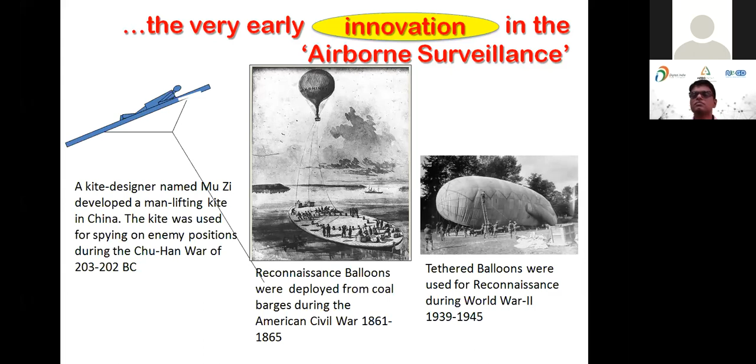In the early BC 203-202, a Chinese kite designer designed a huge kite by which a man can be carried on it, who could probably fly and see the location and the formation of the opponent, thereby giving enough information to the fighting side who can probably win the war. Likewise, this type of reconnaissance balloons continued during the American Civil War in 1861-65. Likewise, even in World War II, the balloons were used for various applications.

Having said that, in the Second World War time, both radar and the aircraft matured to a state where the fighting vision was mostly from the air. While the aircraft were able to fly at a tremendous speed and come close and bomb the various places, the World War II radars also were able to identify, detect, and find out the presence of the enemy's aircraft in the territory.

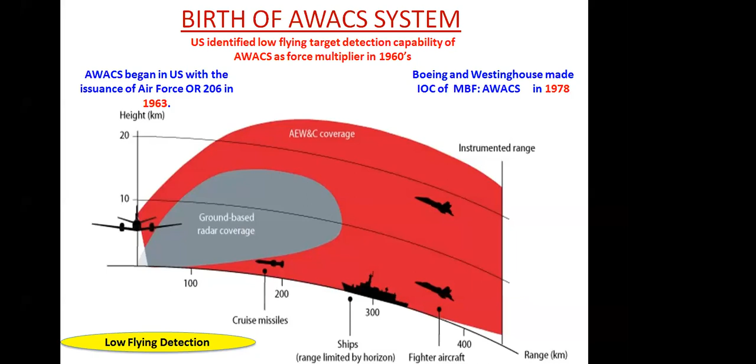So there was a conflict of interest. While the enemy would like to penetrate, the other country is able to see him at a far off distance itself, using radar. But these ground-based radars cannot see the targets which are flying at low heights.

So the pilots started an innovation by flying at low heights, meaning the ground-based radars cannot detect them. As you can see in the picture, the gray shows targets can come very close to us if they are flying at a low height.

So therefore, an invention started for bringing in AWACS, which is nothing but radar and other sensors put on board the aircraft, which could see much longer distance even when they are flying at a low height.

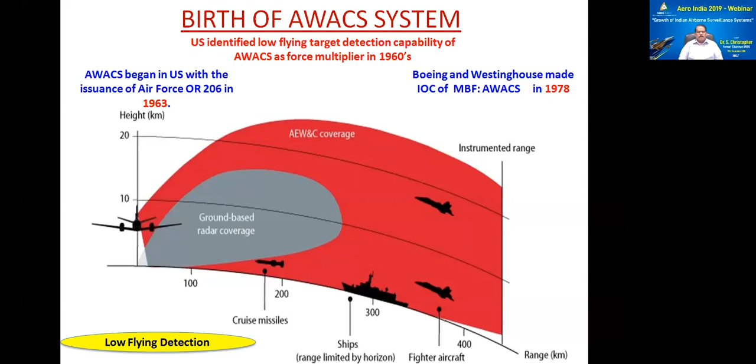For instance, AWACS began in the US as an operational requirement 206 in the year 1963. However, the IOC configuration could be introduced, even as a B2 whatever we call it, only during 1978. So it has taken about 15 years, whereas the full-fledged AWACS has taken about 20 years.

In the case of AWACS, what exactly does it do? It gives a multiplying effect for our force. When they are at the forefront, they may not be operating the radars, but the surveillance radar on an aircraft at the back could see much beyond and was able to communicate to the fighters and give them the required information. So that is how it is a force multiplier.

In the Gulf War in 1991, it was told that it was won by AEW&C, Airborne Early Warning and Control Aircraft. Hawkeye is one, and of course Sentry is another one, E2 as well as E3. The difference is one is on an aircraft which is a turboprop, the other one is a turbojet.

Obviously for short runways or a shipborne aircraft, it has to be a short runway. Naturally, the Hawkeye is the very useful one, whereas the Sentry can be used for very high altitude, long endurance, long surveillance.

At that point of time, it was used only with mechanical rotation. That means you have to have an antenna fit onto the dome which rotates at an RPM. The revisit is not possible. It's a mechanical scanning, which means inertia comes into play.

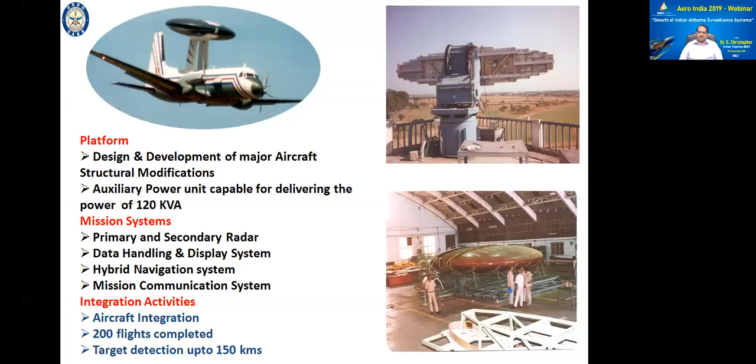So theoretically, worldwide there were systems with mechanical scanning, which you can see 3 of them - American AWACS, as well as E2 and E3. In addition to that, Russian systems are also available.

While on the other side, early 2000 onwards, started by Ericsson of Sweden, what is known as Erieye - that has electronic scanning. What you can see is the flat antenna without any dome, fitted onto a smaller aircraft, which could see on either side plus minus 60 degrees. That means out of 360 degrees, they can cover up to about 240 degrees, slightly stretching even up to about 300 degrees. That's the maximum possible with those aircraft.

But then the technology is entirely different. There is no mechanical scanning, but it's totally electronic scanning. However, if you require 360 degree coverage, you must go with a minimum of 3 such antennas to cover the entire 360 degrees, or you can even use 4 antennas also.

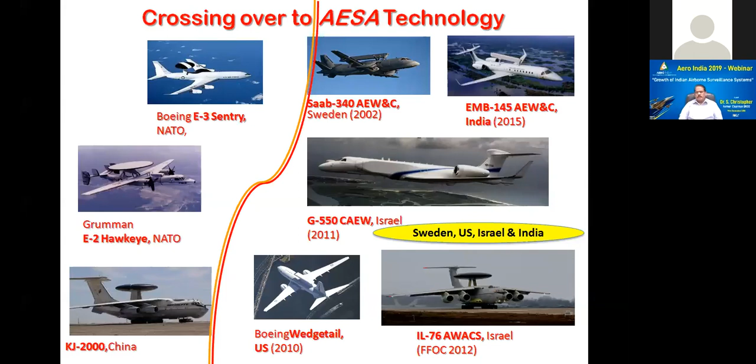So the advantage of AESA is basically to get inertia free. That means you don't have to have a mechanical rotation, which is really going to make your scanning or searching operation much longer, particularly when you're looking at a target which is coming at far off distance. You may have a revisit much later because the antenna has to make one complete rotation, while the AESA, that is active electronically scanned arrays, can probably revisit any number of times in a fraction of a second.

For us to conclude the presence or absence of the target right in the far off distance, thereby you are able to manage the energy given to you very effectively on those areas, whichever you like. In addition, in the event of failure, a single transmitter failure in the mechanical system would have probably stopped the total operation. While here, n number of TR modules, what we call it is a TR is nothing but the transmit receive modules, can probably stop working. In spite of that, we will have what is called graceful degradation. Obviously, the performance enhancement can be there because you may not be unnecessarily wasting your energy in all directions. However, you will spend more time and more energy on the direction of your interest.

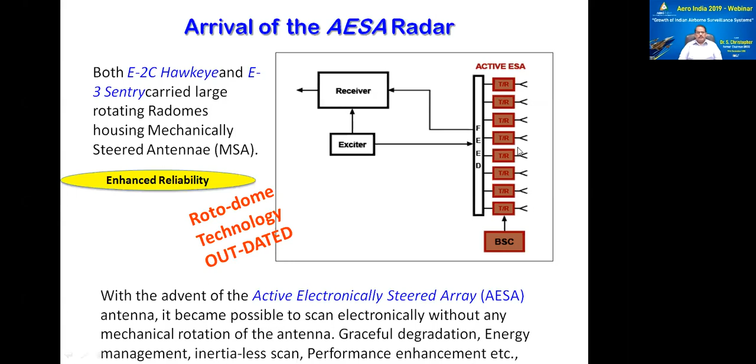So going back to the TR module specific, there is a small equipment or a sort of a unit which contains the final transmitting power, if not in megawatt, it is generally in watts, followed by also it will have an LNA. That is the transmit side, simple, smaller wattage level, that is hundreds of watt level transmitter, and the very sensitive receiver, both are there in a unit. If you can keep them together, multiple of them, then you call it as sometime transmit receive multi-module. That's what we are calling here TRMM.

In this particular example, we have used 8 of them together so that we could have thermal management effectively distributed. Because we are not having a single transmission, the power is getting probably amplified in more than one place. Naturally, the heat source is not going to be concentrated in one place, so the thermal management is excellent in these cases. In addition, this is precisely using what is called gallium arsenide technology, and further we have gone ahead with the gallium nitride technology also. These are all solid state amplifier devices having got an efficiency of 30 to 50% efficient.

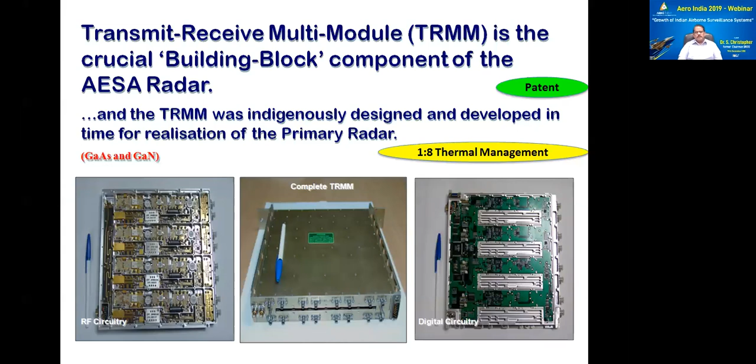What is the advantage of the primary radar having AESA is, as you can see, the scanning need not necessarily be sequential. You can go in any random sequence and have a revisit on the place of your choice and your interest. When you look at a threat, the threat is to be observed again and again till we confirm ourselves that the threat is a real threat or otherwise. So naturally, we have got an ability now with the AESA to have a relook on the targets any number of times. In addition, you can enslave your secondary surveillance radar also to the same place to not only identify but also to classify whether it is a threat of what nature, using the combination of primary and secondary surveillance radar.

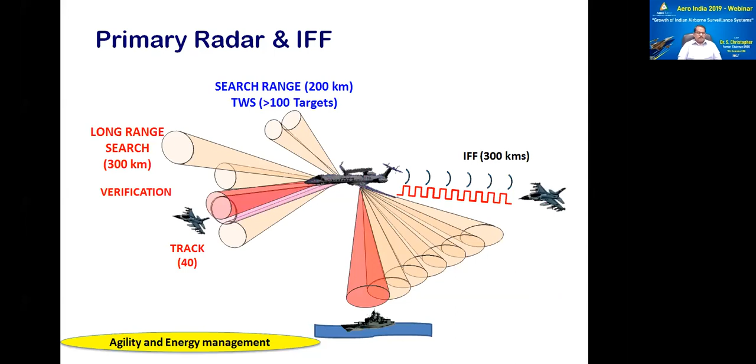The range part of it, some numbers are given here. That is immaterial because as long as the aperture as well as the power is managed, the power aperture product gives the range. You can always extract, by looking in some direction for a longer period, much longer range than what is indicated.

The total system was probably a combined effort of several organizations even within DRDO. CABS is a nodal agency which has taken the responsibility of the platform, its modifications, its wiring, and so many other aspects. In addition, it has also taken the complete secondary surveillance radar, mission communication system, mission system computer, and the operator workstation.

In addition, the primary radar has got a very critical element, which is nothing but that antenna unit which is on the top of it, which we call the active antenna array unit, AAAU, and it contains the power supply, radiating element, as well as the entire TR modules. So naturally, it also needs to be cooled and also needs to be powered.

The entire responsibility is taken by the nodal agency called Center for Airborne Systems, while the rest of the radar, two more elements like signal processing and data processing, as well as the exciter, was done by another organization called LRDE. Likewise, communication by DEAL at Dehradun, CSM by DLRL Hyderabad, and ESM and SPS by DARE. All these units are different labs of DRDO.

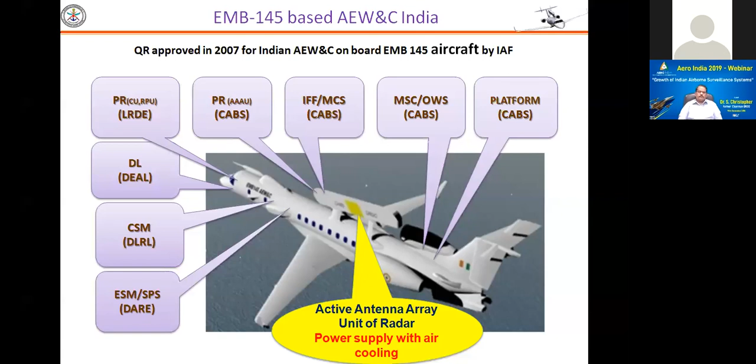We also have a KU band SATCOM terminal. The reason being, when the aircraft is operating at a range beyond line of sight for the other data link, you can always continue to communicate back to your station through satellite.

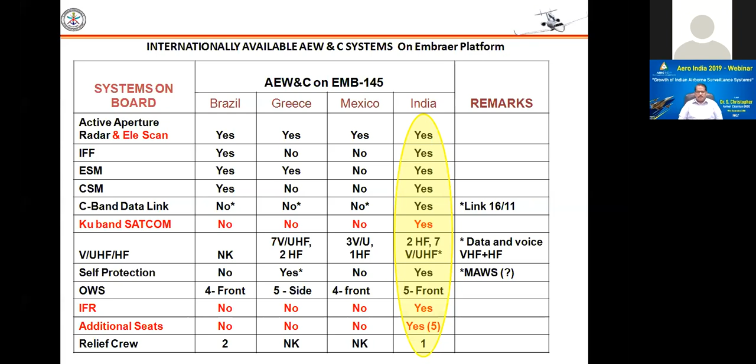Also, one unique thing in the aircraft itself is the IFR, in-flight refueling system, which does not exist in any Embraer aircraft till today. In the AWACS, it is very essential because you get additional flying time. Obviously, because you're refueling, you must have some extra seats also.

The entire interior is nicely ergonomically designed, with 5 operator stations and 5 rest crew seats. All the other electronics is nicely packed in rack form, so you cannot see any cable or hanging things internally.

It also gives a very good advantage of noise reduction, so personnel working inside have a comfortable time for long periods of serious work. It has additional 4 fuel tanks inside, in addition to the wing tanks, to extend endurance for a longer period.

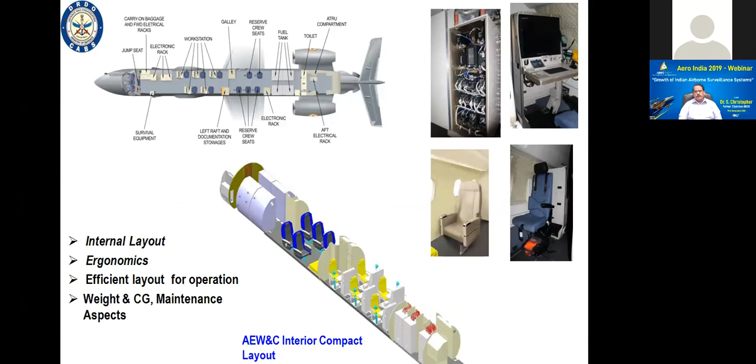In addition to the interior, externally, if you look at it, there are a huge number of antennas. Some of them are small, and you may not be able to visibly see them, but there are so many sensors out there. The aircraft per se has about 29 sensors, whereas this system has added many more, so nearly 80 sensors in total are on the aircraft.

The challenge here is, what do we do when we have too many antennas and sensors all around the aircraft? How do we avoid mutual coupling or interference from one to another? It is possible only if we manage 3 things: space, frequency, and time. When I say space, that means if I want one antenna to not interfere with another, we have to separate them as far as possible.

With a given small aircraft, there is a limitation on that; you cannot indefinitely keep them separated. So then what we do is try to exploit the frequency, the spectrum. When one radio operates in one frequency, we try to use an entirely different or far off frequency for the next radio. But then you've got 7 radios simultaneously working, so naturally a lot more has to be done.

The last point is time. When we operate the radar, pumping huge amounts of power, there is always a possibility a receiver on the ESM side may get saturated because of the huge power coming from that radar transmission. So it is possible for us to give a gap or put a notch filter to avoid those frequency areas. By doing this, combining all 3 - space, frequency, and time - we address this challenge, and it was indeed a problem.

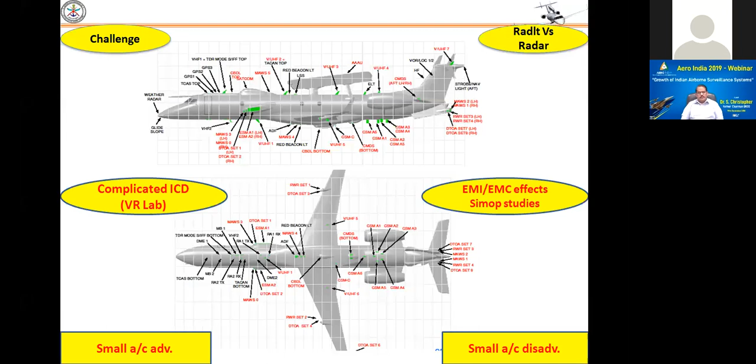Having done this aircraft modification, interior and exterior, the major component, which is probably very critical in this system, is the AAAU, the active antenna array unit, which goes externally.

Unlike any other conventional radar antenna, where enough energy would have been spent designing the antenna per se for performance - its pattern, side lobe, or gain - in this case yet another dimension has to be considered. First of all, it has to be aerodynamically very streamlined, because being an external unit, it is likely to give drag.

Naturally, the aerodynamics has to be taken into account, and the internal aerodynamics also, because we are trying to save the energy for cooling or for the heat removal by simply using the normal flow of air as the aircraft flies for cooling the electronics, which is a very critical system. Likewise, we have got a radome to be tackled, which has to have complete transparency as far as the microwave is concerned, but at the same time should have enough rigidity to protect the antenna.

And there are a good number of softwares. It should not get corrupted, and there are a good number of tiny, very small electronics; it should not get burned. So all these things have to be taken into account in terms of design.

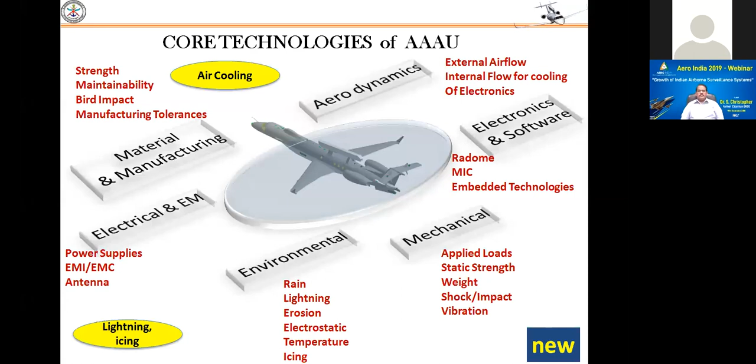So looking at the interior, the air goes from the inlet and takes a turn downward. This is specifically done to ensure the rainwater that goes inside cannot reach the electronics but can only go downward, as the water particles are heavier and will not rise to the top, whereas the air alone will go for cooling. There is a trap for the rainwater, and it gets collected and removed. That is the way of protection from rainwater soaking directly.

However, they are all made in such a way that some amount of spraying water will not make any difference to the electronics. In addition, as the air traverses, it has a tendency to go towards the end and get exited through the few TR modules kept at the end of the entire array. But the design has to be such that we ensure each and every TR module, right from the beginning till the end, is able to cool in an appropriate way.

The bottom portions show the design details. The hotspots are given to you, and how these hotspots remain well within the permissible limits of the operating temperature of the elements or electronics used.

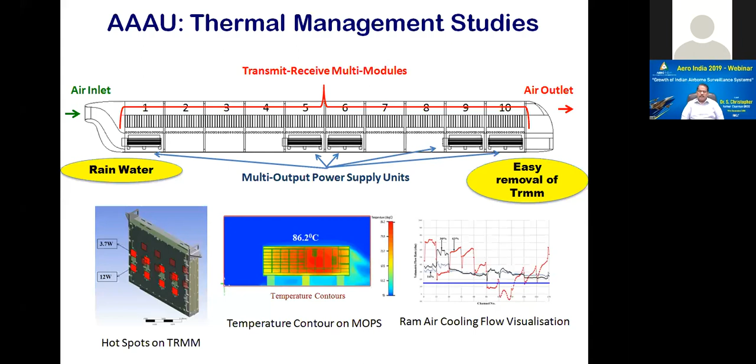We also made use of the entire antenna in a very effective way to ensure that structural rigidity comes out of the antenna itself. The antenna is nothing but a slotted array which radiates the S-band, whatever frequency we are assigning, so it is basically a metallic body. The metallic body gives us two advantages, which is why we call it one of the innovations. One is that it gives rigidity to the entire antenna in terms of flexing and other structural aspects. In addition, it also gives a sort of Faraday cage for the complete electronics inside. That is the reason we could achieve very good shielding when there is a lightning effect.

We have tested this antenna against simulated lightning, and there was absolutely no problem for the electronics with this.

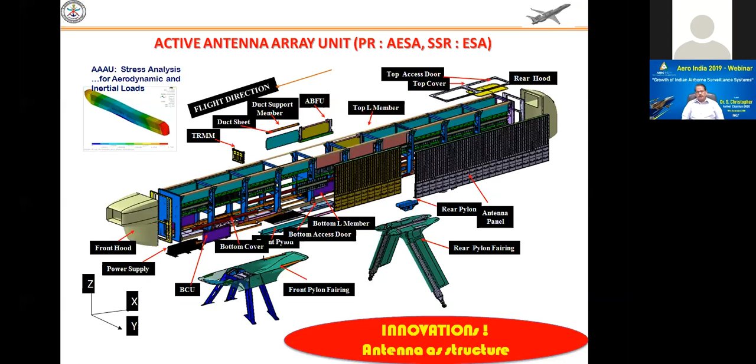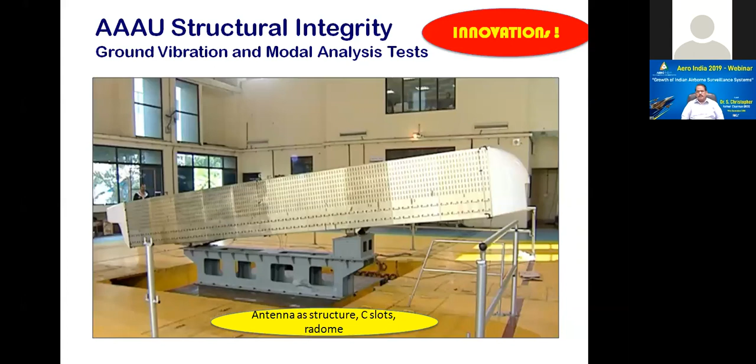The actual antenna being tested for various conditions - you could see the slots because the top layer of the radome is removed in this case. We also see two different types of slots: one for the primary radar, the other for secondary surveillance radar. The structure is made out of a metallic body, which gives us the advantage of sufficient strength and rigidity, as well as the property to protect or shield the electronics inside.

The most important aspect is the radome. The radome is supposed to give protection for the electronics and the antenna. At the same time, it is also supposed to be transparent.

And it is completely tested for all the properties and it is satisfied totally.

In addition, the peculiarity of the total system is that, like any other aircraft, this being an external item has to go through what is called the bird strike test. Unless it passes the bird strike test, we cannot use it as an external body. So we have gone through the testing and are completely satisfied.

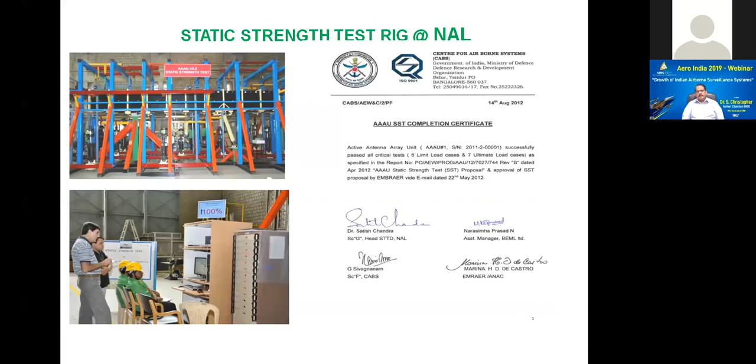We did the static strength test at NAL with a very good amount of tolerance, and it could meet that. The problem is, if you over-design something very rugged, I'm sure all the tests will pass, but still nothing will have been proven. If you do a flimsy design, it will break even before we conduct a few critical tests. But I was told by the Brazilians themselves that our design is excellent, in the sense it was very critically designed and thereby optimum for the usage.

In addition to the structural aspect, when you look at the electronics, the TR module is only generating the power. That power needs to reach none other than the antenna elements themselves. Unlike other systems in the world, which have no electronic scanning in elevation, only azimuthal scanning, here we have taken the responsibility of including electronic scanning in elevation as well.

That is how the number of cables is much, much higher here - equivalent to about 2 kilometers of RF cables are utilized to power the 8 elements in elevation, and that gives us a scanning capability. Even in steady state flying, when there is a roll of 1 to 2 degrees, the scanning will take care of it and keep the beam right on the target, even at low flying stages.

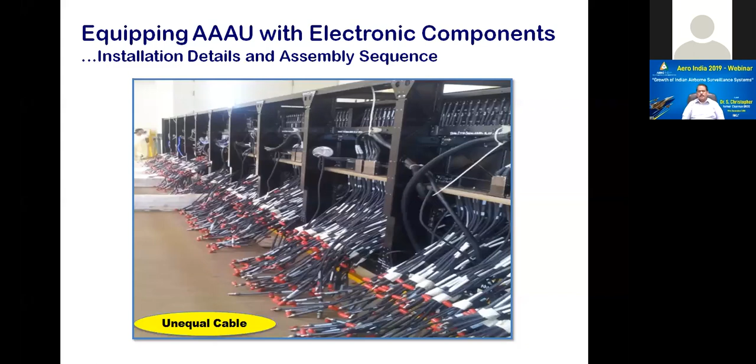Another important point to look at is what is called water stagnation, or the place where ice accretion can happen. When ice is formed, it will break after some time, and that piece, if it happens to go into the engine - this aircraft having a rear engine - there is a possibility it can create an engine failure problem. In order to avoid that, we were given a constraint of not more than 600 grams for any piece of ice that breaks and falls. So that is a constraint.

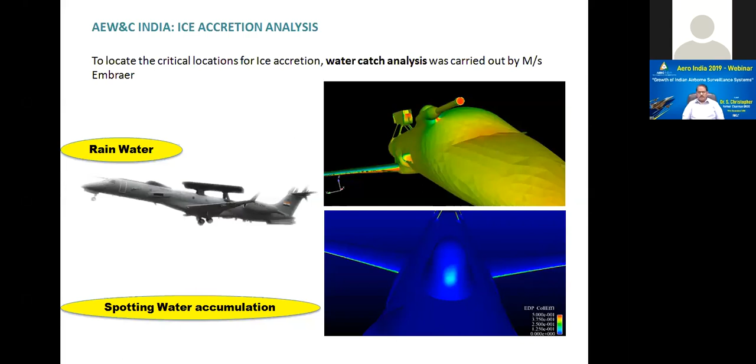That is what the design has to go through. We've gone through that. Next. So if you see that in the case of the radome, the places where all the ice can form as the aircraft travels through the icing condition, those places are to be protected. Next.

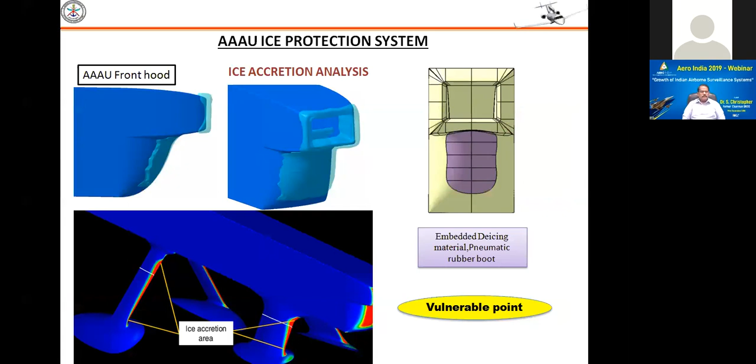When we do that, there is a possibility of having an electrical way of removing the ice, or compressed air or air from the engine can be utilized to break the ice. The second option is utilized because consuming electrical power is going to be detrimental for operation of the system, as it is going to consume some amount of the available power continuously. So we found that a very elegant way of doing it is through the compressed air. However, in the antenna, a lot of changes and modifications need to be done to see that the compressed air is taken to the places of interest.

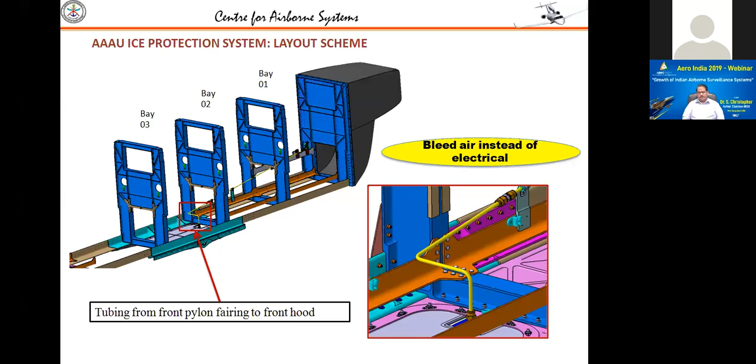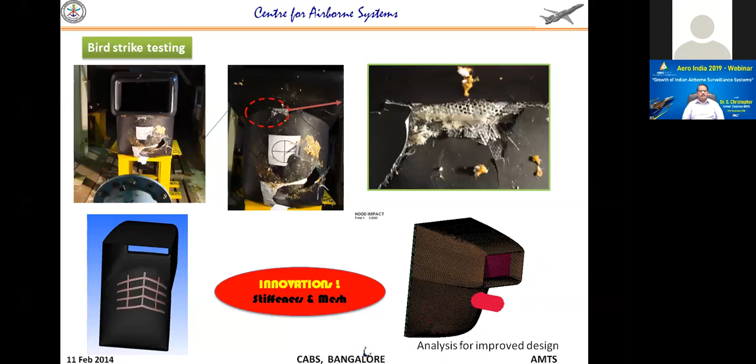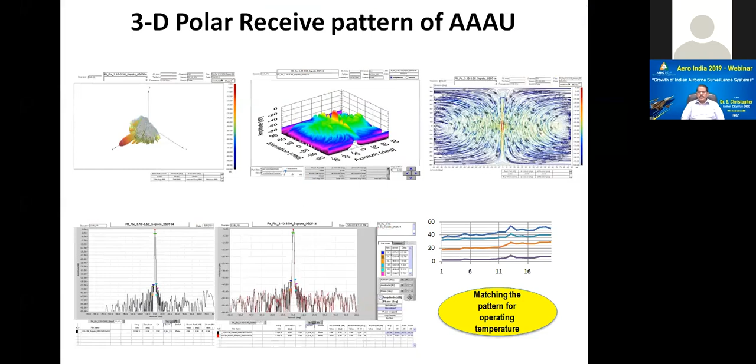Now, ultimately, looking at the antenna as an antenna as such, the pattern ought to be looked into. Being an airborne radar, the pattern in 2 dimensions is not the only thing that is essential. We need to look at it in 3 dimensions because apart from the main lobe, the entire side lobe structure is going to look at the ground, which means there is going to be a lot of clutter. In addition to that, what we test at the ground has to be evaluated when flying at a higher altitude, where the temperature could be lower. Even that is tested and managed.

The next part is, when we combine both the primary and secondary radar, the process through which we evaluate, and ultimately what we call calibration, so that the antenna elements behave uniformly and get you the best possible pattern. Next.

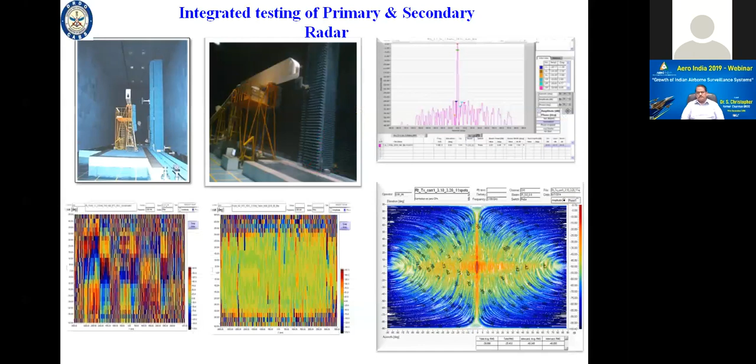Another important study: the antenna, given a chance by the antenna engineers, should be as far away from the body as possible, meaning infinite distance between the body of the aircraft and the antenna. From the aerodynamic structural point of view, it should probably be inside the aircraft itself; then only it is the best. But we have to come to a compromise. The study was conducted and we evolved a very good distance by which both the aeronautical requirements as well as the electrical requirements were just met.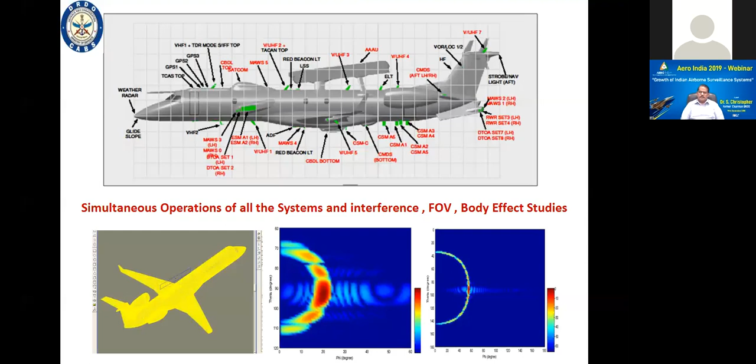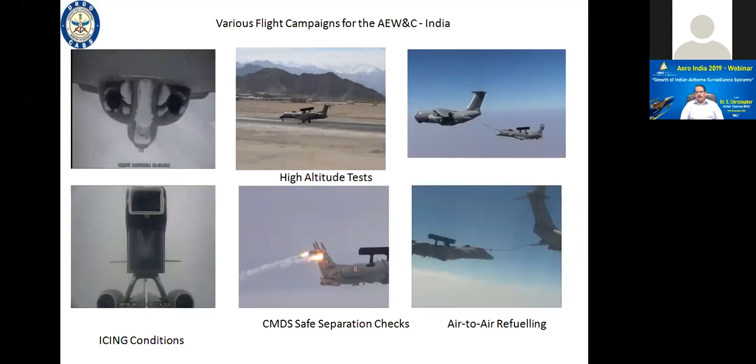These are some of the tests and trials carried out. One is in Norway, where we conducted the trials for the icing conditions. As you can see, without using the icing equipment, how the ice will be formed, and then we created that, and finally we cleared that. The other one is the highest altitude at Leh. The takeoff and landing was done, and air-to-air refueling was carried out several times. In addition to that, the emission test for protection against missiles was conducted using CMDS or flares from the aircraft. All those tests and trials were conducted.

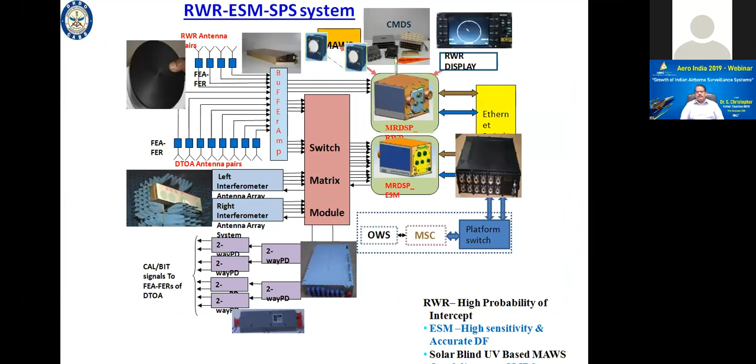In addition to the radar, the other major important system is the ESM system. It also has to have a self-protection unit and obviously the radar warning receiver. All were combined, and it gives 360 degrees coverage for the system. This is specifically how the CMDS is controlled by the pilot. When he finds a threat, the cockpit monitor shows what direction the threat is in, and the pilot decides on the type of software to be used for avoiding the threat. That is what is being depicted here.

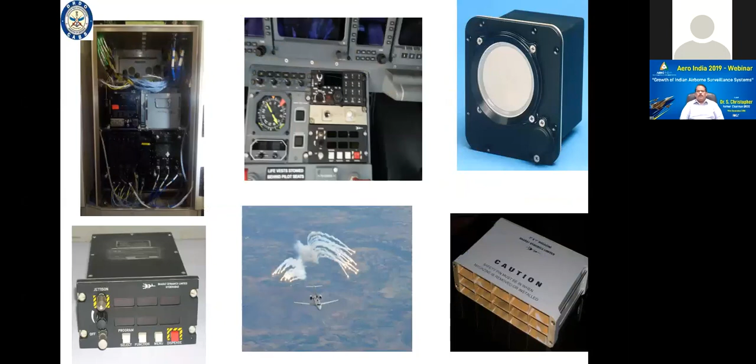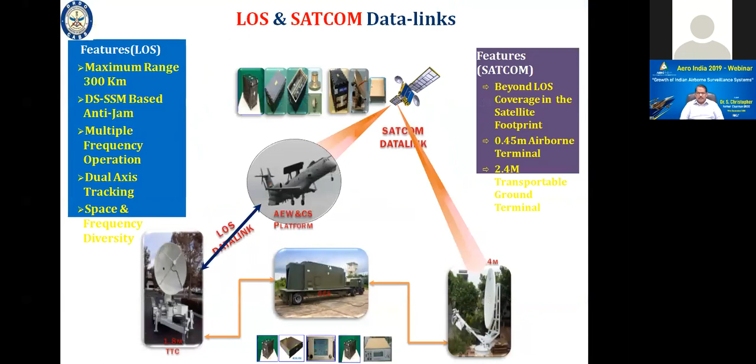We also said that we have a communication system. In addition to the line of sight communication, we also have what is called satellite communication. So beyond line of sight also it can be covered, and it is all the time coming to the ground. The mission communication system is nothing but talking to the pilots, giving them instruction, and there are 7 radios there which operate both in VUHF as well as in the HF region.

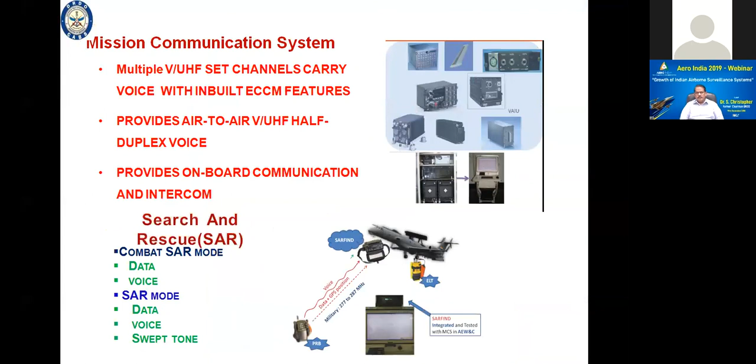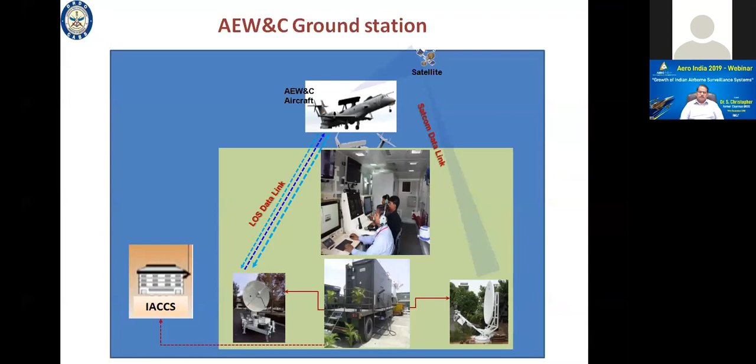Next. As regards the ground station is concerned, we must have an equally powerful ground station, because entire AWACS information is going to get into the IAF node, that is IACCS, and thereby we can transmit and also get the information from various radars.

The last but not the least is the ground preparations. We call it mission planning and analysis station, where the entire mission is planned, and when the mission is completed, complete data is analyzed to get full information about the entire process.

Next is, for any of this operation to go ahead very well, the operators ought to be trained. We cannot train them all the time on air. So a huge setup is created, equivalent to whatever is there in the air. In addition, we also have a trainer, and he also has the possibility of introducing the recorded data as well as simulated data, which may or may not come in the entire lifetime. But however, the operator must be trained for those situations. That's how the training station is created.

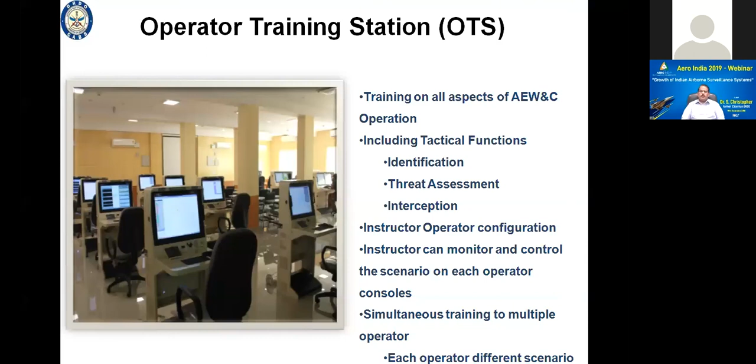Next. Having done that, all the equipments are very high quality equipments. It may not be possible for us to just test with a very simple methodology. And they are not in hundreds of numbers. So that has to have a very good automated test equipment. Almost the entire system can be tested independently or together with this ATE, thereby right at the operator's level itself.

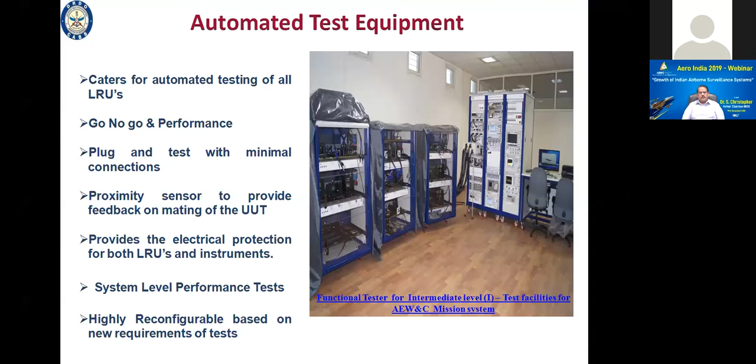That means at the field itself, they can come to know what exactly is the problem and immediately replace and go ahead with their operations, while the part that is to be repaired or is working wrong can be sent to the laboratory for testing. And this ATE is also completed.

So having got the complete maintenance and operation, as well as all the tests completed, as it was told in the beginning, in 2017 the first aircraft in the IOC configuration was handed over to the chief in the presence of the Honorable Minister.

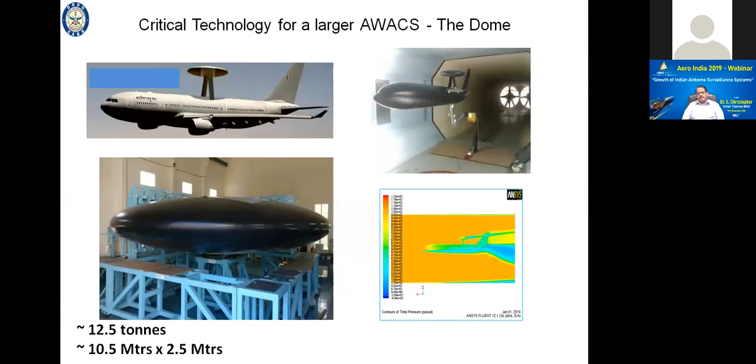Having done that, India is going towards the next generation, which is nothing but the AWACS, which is a bigger version of exactly what we have done. And it should also cover 360 degrees. Obviously, when I said 360 degrees coverage, we must have minimum 3 antennas, which cannot be kept as a rectangle on top of the aircraft. So naturally, when you have a triangle or any other dimension, square or a triangle, it cannot be carried as it is without a covering dome. So this is the design for the next generation. Next one.

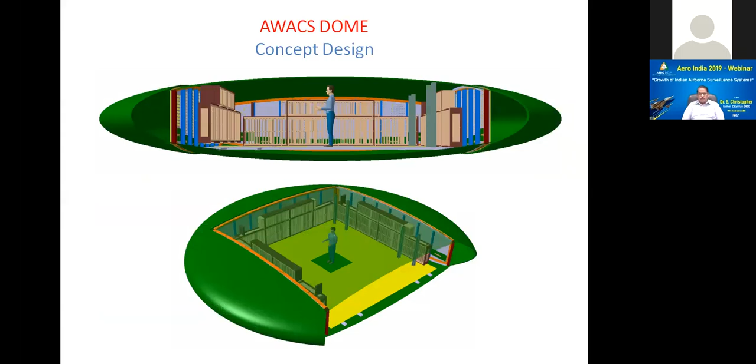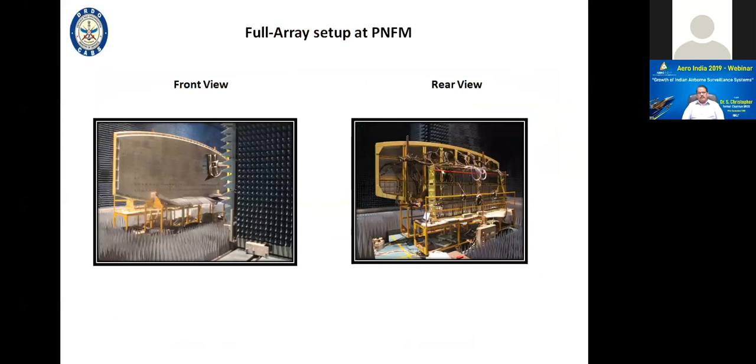This is the concept design to just indicate to you what could be the order of size. A man can stand inside, and in all 4 directions you will have antennas as well as the TR modules placed, and they all will be cooled with water. And the next one is the structural part of the dome, how it will be. You can see that this is 1/4, or one side of the antenna itself, completely designed, fabricated, and tested in the indoor test facility. Next one. And the dome completely made 1:1, the final dome, and it's also tested.

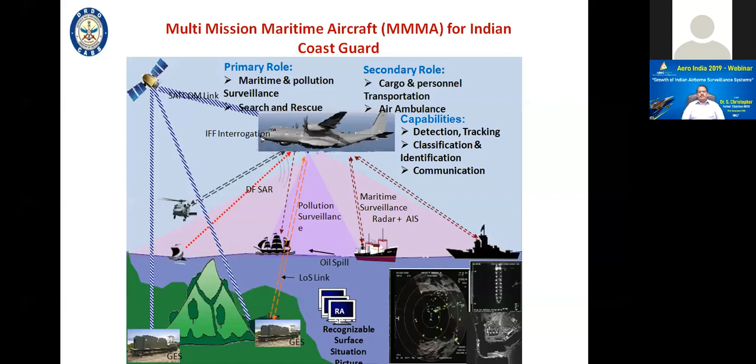Having completed it, there is another new program given to the DRDO that is called multi-mission maritime aircraft. This is for the Coast Guard. These are all the programs and projects going on for the last 40 years.

Next. If you see the journey, in 1978 or so the E-2C got introduced, and in '83, that is about 20 years after the paper was published in the US, the E-3 got introduced, and they're all in operation, and it has gone through various version changes. Presently, I was told it is version D, and it will be utilized even up to 2040. Followed by that, electronic scanning, or AESA type of radar, started with Saab Ericsson, and somewhere in 2004 or so it got introduced, more have come in 2010, and we also came into operation by 2015.

We completed all our tests and gave it to the Air Force for induction in 2017, and we hopefully will be able to complete the Airbus 330 on the next program, maybe by 2020. So if we see, the efforts started for the AWACS program in 1985, but it could not proceed after a technical report and stopped for some time.

In 1993, the ASP program started. However, it stopped abruptly because of the crash in 1999. In 2007, with the OR finalization, AEW&C started and we succeeded in inducting it. And hopefully, AWACS India also will go through the process. Fortunately, I have been associated with all the phases, including the ASP program. Just before the crash, on the previous sortie, I myself was flying in that aircraft.

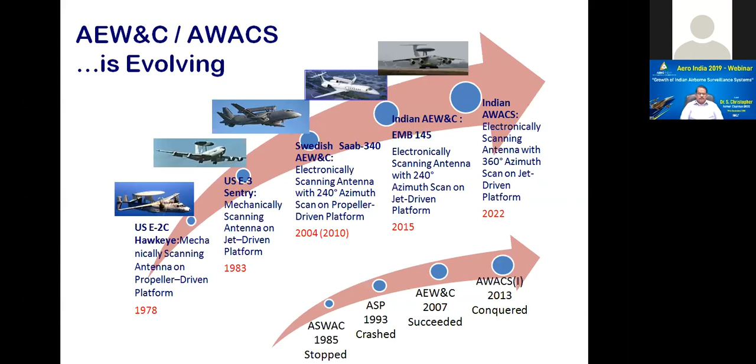So the overall advantage is not only in the procurement cost, but mainly in the maintenance cost. As a matter of fact, when compared to what others have bought in the neighboring country, our system is almost half the cost, including the complete design and development expenditure. So it is a huge advantage initially, and more than anything else, in long-term maintenance it's going to be much more advantageous, and with every possible software and hardware in our control, we can do wonders.

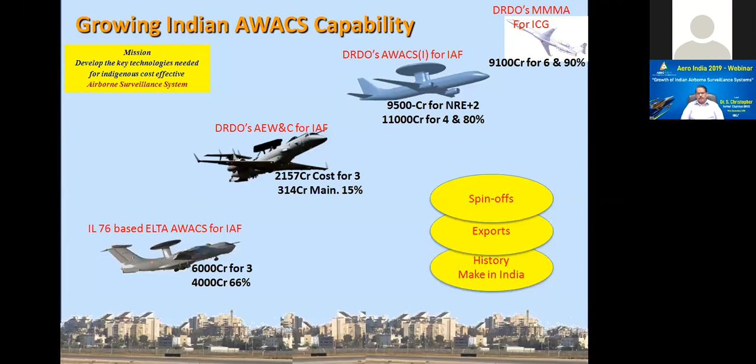So this is the journey. This is the journey carried out by a group of people in the Center for Airborne Systems, CABS, of DRDO, along with various other laboratories of DRDO. In addition, all the other industries, HAL, Bharat Electronics, and other public sectors were involved in various aspects. I would like to thank all of them. With this, I would like to conclude. Jai Hind.